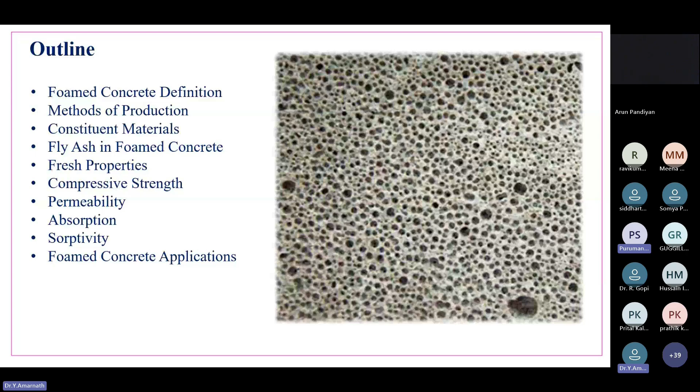Now coming to foamed concrete. If you define foamed concrete, it is a cementitious material where air is entrained by the mechanical incorporation of preformed foam or admixture into a mortar. So that is called foamed concrete. It is a lightweight material. In cementitious material, we incorporate foam into that cementitious mortar by some other external activity.

There are three methods by which we can introduce foam into a cement mortar: first is pre-formed foaming, second is mixed foaming, and third is combined foaming. Coming to the first method, incorporation of foam into the foam concrete to produce the foam: before producing foam concrete, first we need to produce mortar. Cement and water need to be mixed to form cement mortar, which needs to be durable, flowable, and have some consistency. At that stage, we incorporate foam into that mortar to produce foamed concrete. We need to introduce air through foam into that mortar. So those are the three methods.

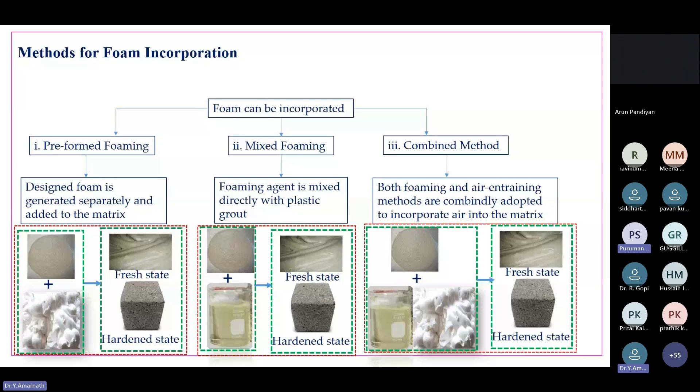Foam concrete has its own unique properties. That's the reason why foam concrete has its own applications, which we will discuss later in this presentation. So first we will discuss the unique properties of foam concrete.

The first property is that it is self-flowing, like a liquid. We can pour it like water. It flows like water, as you can see here. The workability of this foam concrete is very high; we can just pour it like water.

You can see here, it is self-compacting, and it should never be compacted. Why? Because it already contains air bubbles in it. If you allow external energy to compact it, those air bubbles will be destroyed and there won't be any foam concrete left. That's why external compaction is not needed for foam concrete. It is self-compacting.

The third unique property of this concrete is that we can produce a range of densities. This is a major advantage of foam concrete. You can produce densities starting as low as 200 kg per meter cube and as high as 1800 kg per meter cube, depending on the application and where we are going to use this foam concrete.

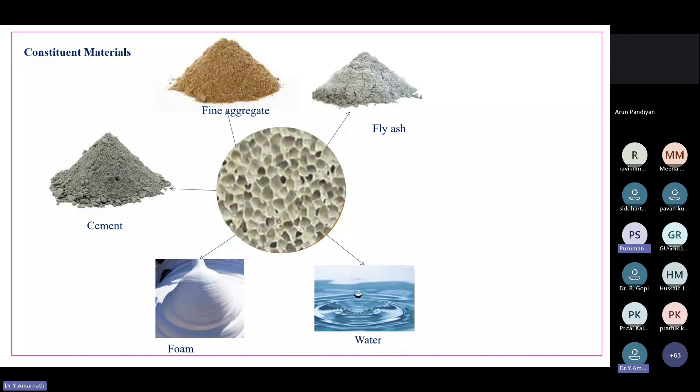As we are discussing, this training program title is Sustainable Construction Material. So, fly ash is one of the waste materials that we use to produce some concrete.

Foam concrete is also not exceptional. We can use fly ash in majority of the cases to produce the foam concrete. So fly ash can be incorporated in foam concrete, and majority of the foam concrete mixes use fly ash. Sometimes in place of sand, only fly ash can be used, depending upon density requirement and applications. Fly ash is replaced either by cement or by fine aggregate, as in normal concrete.

Fly ash can be replaced either by cement or by fine aggregate, for the same density. The replacement levels are as high as 80% by mass of cement in foam concrete production. Whereas it is up to 100% sometimes, as we need not use any sand content to produce foam concrete. That's the reason why 100% fly ash can be used - only cement, fly ash, and foam to produce foam concrete.

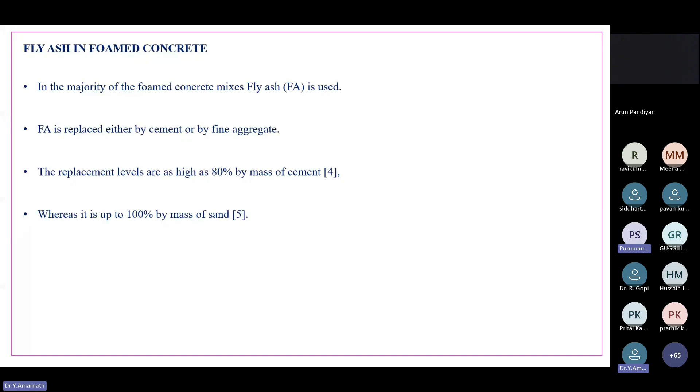If you use fly ash in foam concrete, the consistency increases as in normal concrete, because fly ash has a ball bearing effect. The microstructure of fly ash is at micron level - if you observe fly ash, the particles are ball shaped, so that helps increase consistency. The same property that helps in normal concrete helps in foam concrete.

So if you use fly ash in foam concrete, the consistency increases, like you can reduce the water content. And long term strength - as we all know the pozzolanic activity of fly ash improves long term strength of normal concrete - the same is applicable for foam concrete as well. On the whole, fly ash in foam concrete increases its performance.

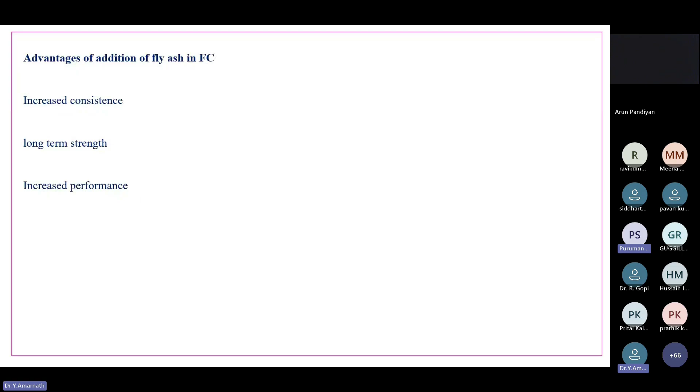Up to now, we have discussed what is foam concrete, what are the special or unique properties of foam concrete, and how we can produce foam concrete using fly ash. Now I will see what are the properties of foam concrete.

Fresh properties of foam concrete: foam concrete has self-flowing ability up to 1800 kg per meter cube, as we discussed earlier. This is a unique property - we can just pour the concrete like water, up to 1800 kg per meter cube. However, depending upon density, this flowability changes. At very low densities, flowability may not be that good; equally, at very high densities, the flowability may be affected.

Depending on the density, the flowability of the concrete is affected, but on the whole, foam concrete is a flowable material. As discussed earlier, for the same density and same water content, if you replace cement with fly ash, the workability of the foam concrete increases because of the ball bearing effect. As you can see in the microstructure of fly ash, the round ball bearing effect helps the foam concrete increase its flowability.

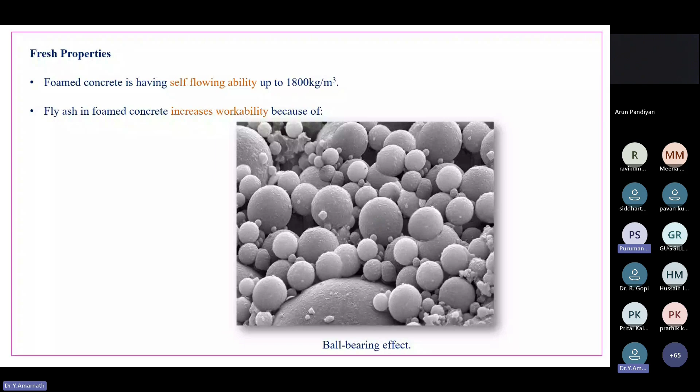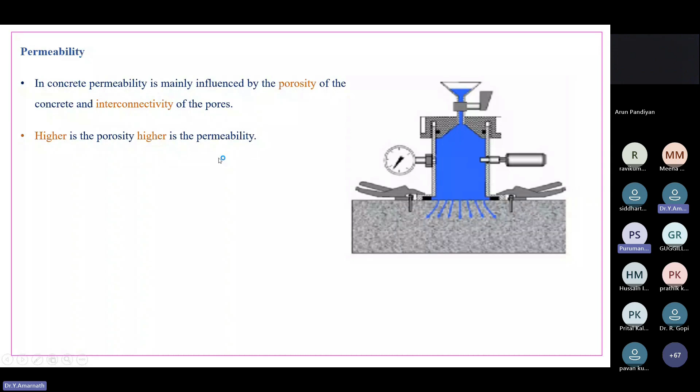In foam concrete, for the same density, if fly ash increases in place of cement content, interconnectivity of pores increases and thereby permeability increases. At the same density, if sand is replaced with fly ash, interconnectivity of the pores reduces and thereby permeability reduces. The comparison here is between replacement of fly ash and sand. If we replace sand with fly ash, the pore system reduces because, for the same pozzolanic activity, the solid material in that particular concrete increases, so the pore system reduces and permeability decreases.

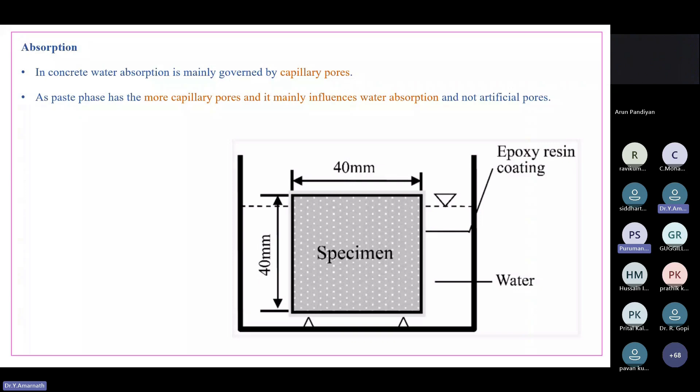Now, coming to the absorption property of foam concrete, contrary to normal concrete, in foam concrete the absorption increases with increase in strength. Usually in normal concrete, as strength increases, absorption decreases. But in foam concrete, at lower levels there is an artificial pore system present, and capillary interconnectivity disconnects that artificial pore system, so the absorption increases at lower levels. Please observe this statement: contrary to normal concrete, in foam concrete the absorption increases with increase in strength. As strength increases, absorption increases in foam concrete, but that is not the case in normal concrete, where as strength increases, absorption decreases.

The absorption increases with increasing density, because to increase the density, the paste content needs to be increased, thereby absorption increases as the paste phase in foam concrete increases with density. For the same density, when compared to sand mixes, water absorption is more for fly ash mixes. This is because sand is a high dense material and fly ash is a low dense material, so if you replace sand with fly ash in foam concrete, the paste phase increases and thereby the capillary pore system increases and absorption increases.

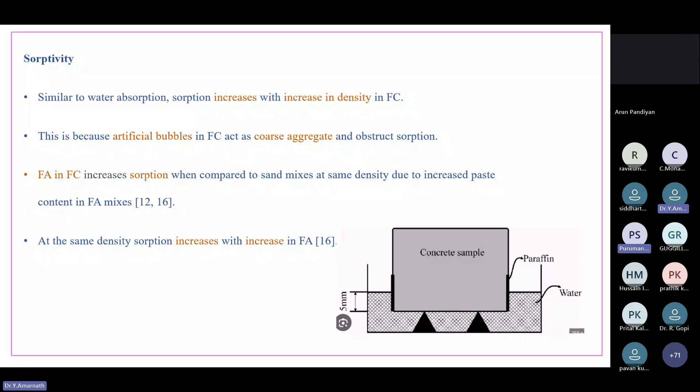These are a few unique properties of foam concrete that we have discussed so far. Now coming to applications of foam concrete. Foam concrete has a lot of applications. We can find many applications in normal construction. Foam concrete can be used in many places.

The first one is void filling. This concrete is very useful at lower densities because at lower densities, cost to volume ratio is very low. So we can use low density materials to fill redundant places like old sewage pipes. Say there is an old sewage pipe which is no more useful - this is one such sewage pipe, filled with foam concrete. Sometimes it may be cheaper than soil, since transporting soil may be costlier, but a cost comparison needs to be done. So we can use foam concrete to fill old and redundant pipe systems, sewage pipes, or any other pipe system not in use.

And open wells - in many places we find wells that are dangerous for normal living. Instead of filling such wells with normal sand or soil, we can use low density foam concrete to fill them. Likewise, cellars and basements of old buildings, all places where the structure is no longer in use, we can use foam concrete instead of sand or soil to fill that redundant structure.

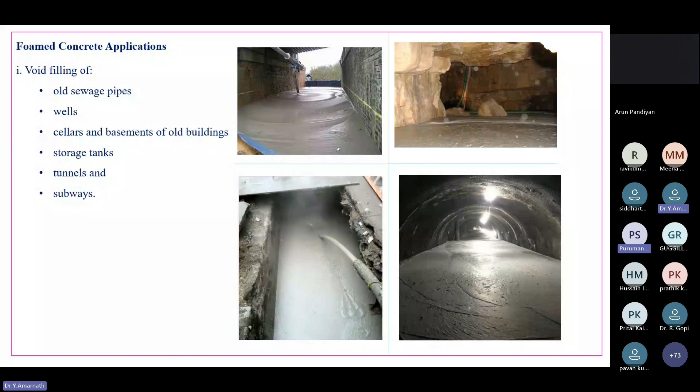Other applications include soil slope stabilization - we can use foam concrete for slope stabilization, one of the economical applications for stabilization of soils. It's also a replacement for weak soil to avoid settlement - in many cases you can take out the weak soil and replace it with foam concrete.

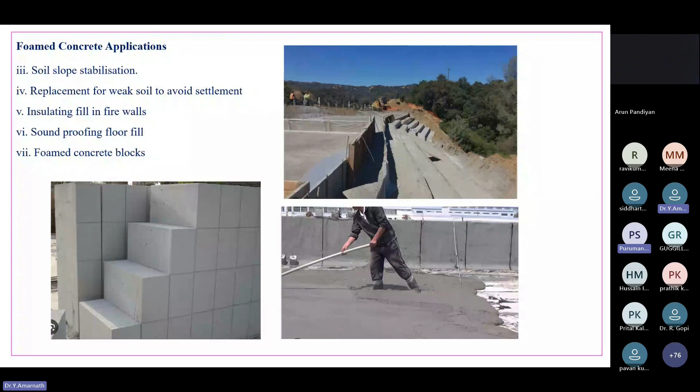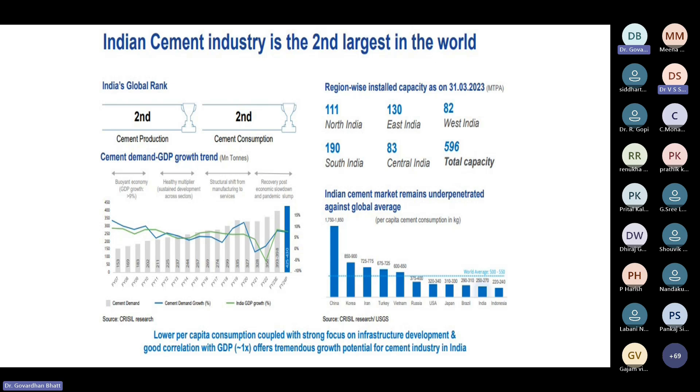Understanding the environmental impact of cement production. Let us understand the impact of cement production on our environment. Cement production is responsible for approximately 8% of global carbon dioxide emissions, making it one of the most significant contributors to greenhouse gas emissions.

The production process involves several stages, each with its environmental challenges, like raw material extraction. This is one of the major issues of environmental impact. When we extract raw materials such as limestone and clay for producing cement, it leads to habitat destruction and biodiversity loss, which impacts nearby areas wherever the plant is installed; the environment gets damaged.

Clinker production: the calcination of limestone in kilns generates the majority of carbon dioxide emissions in cement production. The temperature of the kiln is 1400 to 1500 degrees centigrade. During the cement production process, this is the operating temperature.

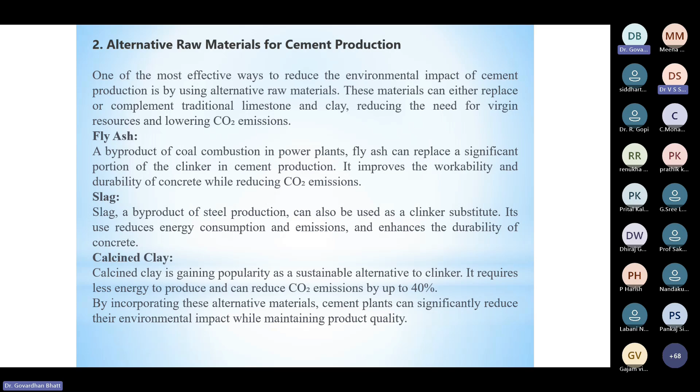Third point is energy efficiency and waste heat recovery. Improving energy efficiency is crucial for reducing the carbon footprint of cement production. Energy efficiency measures not only lower emissions but also reduce operational costs.

Upgrading kiln technology: modern kilns are designed to be more energy efficient than traditional ones. Preheater and pre-calciner technologies allow for the recycling of heat, reducing the need for additional fuels.

As I said earlier, the temperature of the kiln is 1400 to 1500 degrees centigrade. When it goes through the cooler, the temperature drops down to 150 degrees centigrade. This heat can be recycled in the preheater, and we use this heat in the preheater for mixing the cement powders.

Waste heat recovery system: this captures excess heat from the cement production process and converts it into electricity. This reduces the cement plant's reliance on external power sources and lowers overall energy consumption.

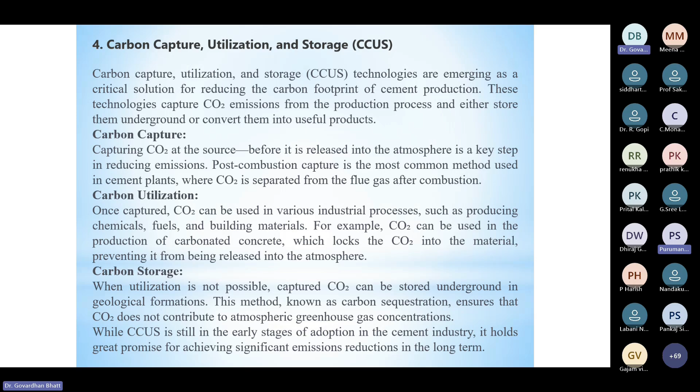Reducing water usage and enhancing water management. Water is a critical resource in cement production, used in various stages of the process, including cooling, dust separation, and material preparation. However, the industry faces increasing pressure to reduce water consumption and improve water management due to growing scarcity of freshwater resources.

In our plant, we store water in our mines whenever we excavate limestone. There are many storage areas in our plant where we store our water, some of which comes from rainwater as well. The main issue is water storage, so what can we do to store this water?

Closed loop water system: implementing a closed loop water system in a cement plant can significantly reduce water consumption. This system recycles water within the plant, minimizing the need for external water sources and reducing wastewater discharge.

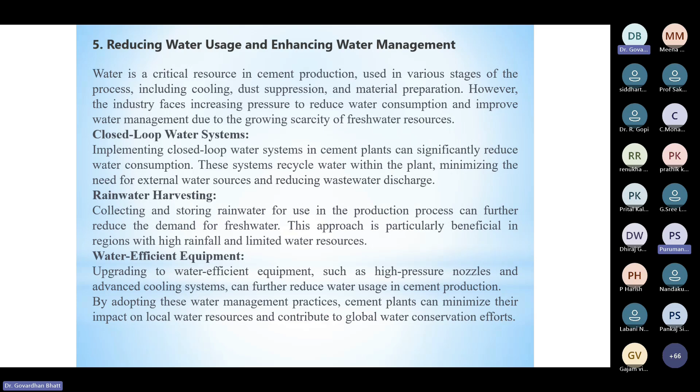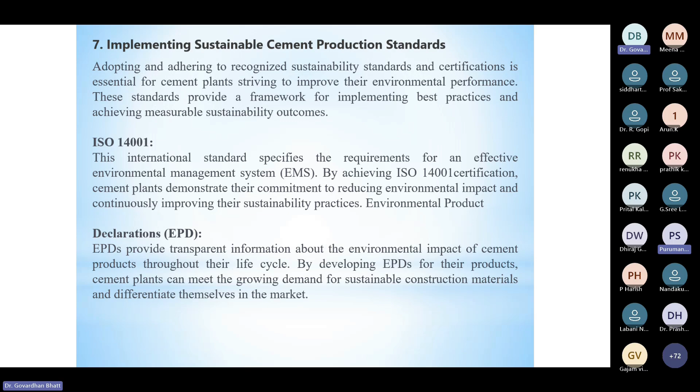Green building certifications: cement plants can also contribute to green building certifications such as LEED (Leadership in Energy and Environmental Design) and BREEAM (Building Research Establishment Environmental Assessment Method). By supplying sustainable cement products, plants can support the construction of environmentally friendly buildings and infrastructure. Adhering to these standards not only enhances the sustainability of cement production but also improves the plant's reputation and marketability.

A few more slides. Community engagement and corporate social responsibility, CSR. Sustainable cement production extends beyond the plant's operations. It also involves engaging with local communities and contributing to their well-being. Corporate social responsibility initiatives play a vital role in building positive relationships with stakeholders and enhancing the plant's overall sustainability.

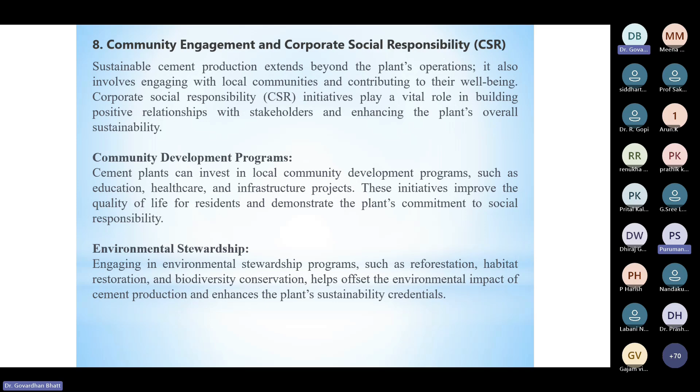Transparency and reporting: regularly reporting on sustainability performance through sustainability reports and stakeholder engagement helps build trust and accountability. Transparency in environmental and social practices ensures that the plant is held to high standards by both the community and regulators.

By prioritizing CSR and community engagement, cement plants can create a positive social and environmental legacy, reinforcing their commitment to sustainability.

The future of sustainable cement production. The cement industry is at a crossroads, with sustainability becoming an increasingly critical factor in its future. As environmental regulations tighten and customer demands for sustainable products grow, cement plants must continue to innovate and adopt sustainable practices like research and development, R&D.

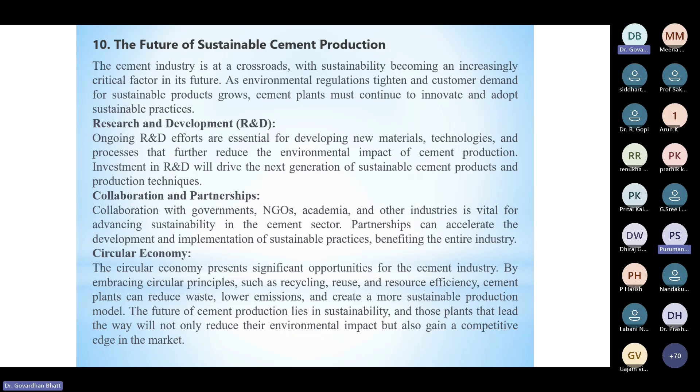Conclusions: sustainable cement production is no longer an option, it's a necessity. The techniques and practices outlined in the guide provide a roadmap for cement plants to reduce their environmental impact, improve resource efficiency, and lead the industry towards a greener future.

By embracing alternative raw materials, energy efficiency, carbon capture, water management, digitalization, and community engagement, cement plants can achieve significant sustainability gains and secure their place at the forefront of the global green economy. As the world continues to prioritize sustainability, the cement industry must rise to the challenge, adopting innovative practices and technologies that reduce its carbon footprint and contribute to a more sustainable future for all.

By implementing these sustainable cement production techniques, your plant can not only meet the demand of today's environmentally conscious market, but also position itself as a leader in the industry's transition to a more sustainable future. This approach will ensure that your cement production processes are not only efficient and cost effective, but also aligned with the global goals of reducing carbon emissions and conserving natural resources.

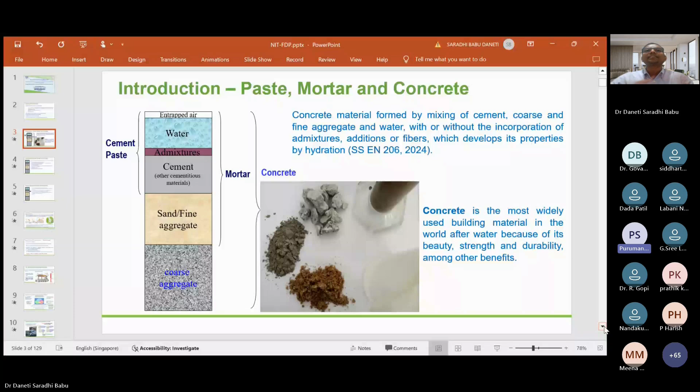If you look at materials research, especially on cement and concrete, there are so many areas, because every component gives you scope to come up with a research proposal. Sometimes you may need to understand more about the microstructure of concrete, which requires special testing methods different from what currently exists. Likewise, you may need to understand the cement chemistry behind it, and there are different cementitious materials we need to consider, because later I will show you why we need to use cementitious materials instead of ordinary Portland cement.

On top of that, those are part of sustainable materials - use of recycled materials like byproducts, alternative materials, all those are sustainable materials, and I'll show some examples later. Admixtures for different applications may require different performance criteria - workability, strength development and setting time controls. Fibers in concrete are also getting popular because they help minimize cracking tendency, and controlling cracks enhances durability. You can also work on other special materials like lightweight materials and aggregates. So concrete is a very huge area with a lot of potential for research.

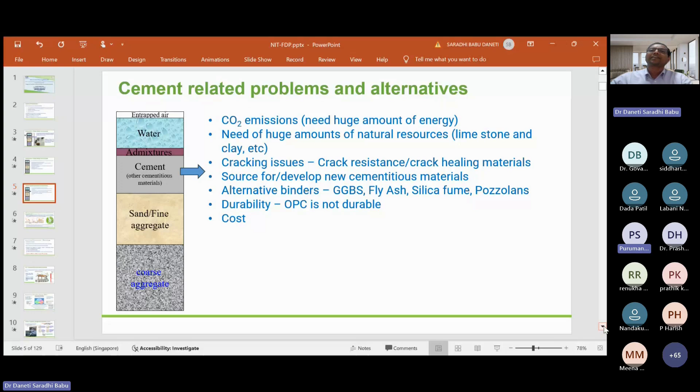We also have to give priority to the durability of the concrete, because when we design a concrete structure for 50 years or 100 years of service life, we have to use the required performance criteria, also consider it when we come up with a mix design for a specific construction. And always you have to think about the cost, how to optimize the project cost while fulfilling all the required performance criteria.

So why do we have to go for low embodied carbon products? Because buildings are currently responsible for 39% of global energy related emissions. 28% is from operational emissions. Operational emissions are basically the emissions after the construction of a project, in terms of energy related needs for heating, cooling, to power them, we have to use a lot of energy.

The remaining 11% comes from materials and construction. This part we call embodied carbon, all the 11% from materials up to construction. Beyond that, after construction, during service life, emissions are involved as operational emissions. Even though embodied carbon looks like a small amount compared to operational emissions, the huge stock of constructions involved to cater for the increased population is the reason why we have to give priority to it.

Some estimates say that towards the middle of the century, as the world population approaches 10 billion, the global building stock is also expected to double in size, which means we may expect a substantial amount of embodied carbon emissions apart from operational emissions, which as a civil engineer or material researcher you may not be able to control. But you can give priority to control the embodied carbon related emissions.

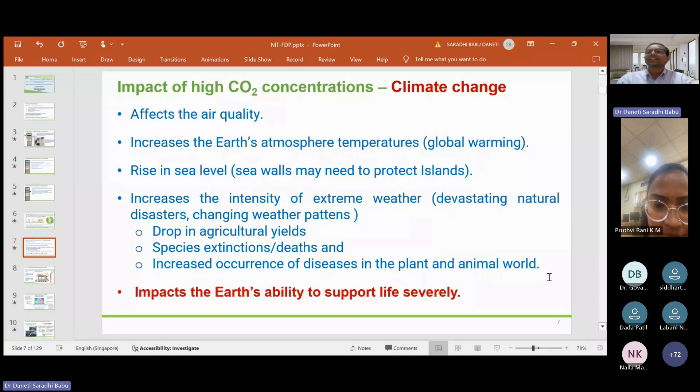So where do these emissions come from when it comes to the cement and concrete industries? Cement is one of the fine powders, basically a soft powder used as a binder because of its hardened properties when it is mixed with water. It is produced from a mixture of limestone and clay that is charred and then ground up. Here limestone and clay are natural materials, and you need to mix them properly.

After you grind them to a fine powder, you have to feed them through the rotary kiln. When you feed through the rotary kiln, which involves 1450 degrees Celsius temperature, the material will be converted into a clinker in the form of CaO plus CO2 liberated. In that process, basically there is a huge amount of CO2 liberation that takes place.

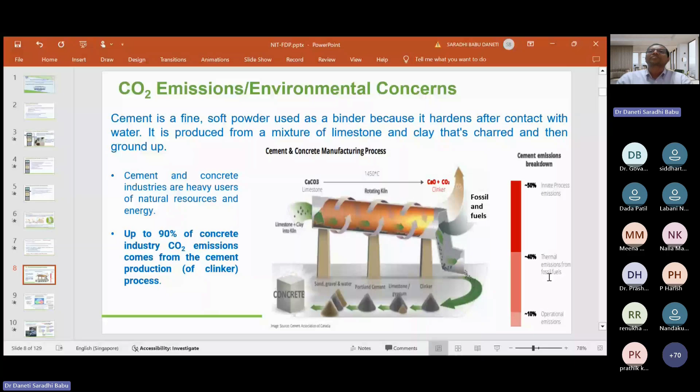On top of the transportation of cement to construction sites, we use a lot of natural resources like aggregates to produce concrete. Even though subsequent emissions are not so huge, cement production creates a lot of CO2 emissions. In the cement and concrete industry, basically 90% of emissions come from the cement manufacturing process itself. That is the reason why supplementary cementitious materials play an important role.

Later on I will show you some numbers and examples. You will understand how significantly we can reduce the CO2 emissions with the use of supplementary cementitious materials.

These supplementary cementitious materials are byproducts from other industries. Sometimes we use the available natural soil or similar materials to convert into natural pozzolans. Once it is a byproduct, it becomes waste. If there is no application for it, it takes up land for landfilling, which pollutes the soil as well as the groundwater. So as long as you have a usable application for the supplementary cementitious material, that increases the value of the waste product at the same time.

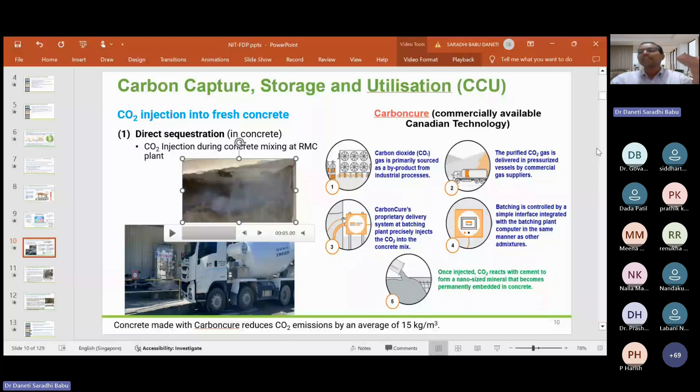As I mentioned, there are a lot of researches ongoing worldwide. Some are trying to pump CO2 into recycled aggregates to understand the potential absorption levels.

Some are trying to pump CO2 into recycled water, since recycled water, once it has certain parameters, can react with CO2 and produce some useful minerals. It can be used as a strength enhancer in some scenarios.

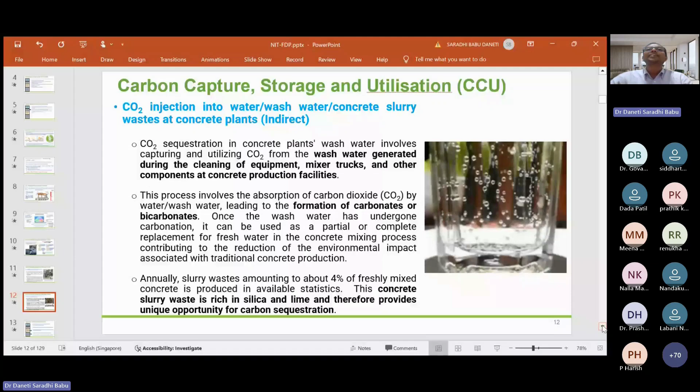As I mentioned, there are researches ongoing trying to pump CO2 into water as well as recycled water, and those recycled ready mix concrete slurries. When you have ready mix operations, there is always a lot of washing water. These wash waters can be treated and used to a certain extent with these kinds of technologies.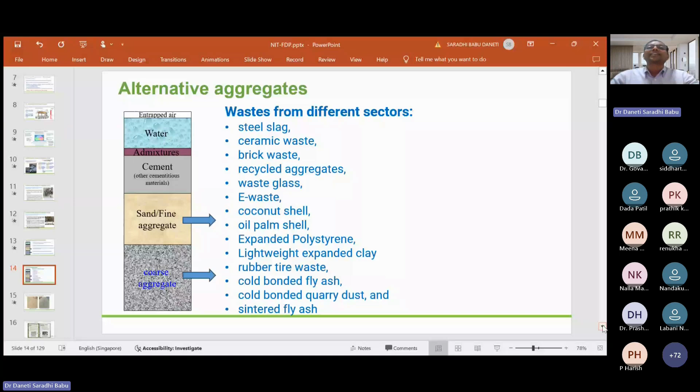And the particular provinces. So if you look at natural resources, if we keep relying on river sand and things like that, there is always erosion happening because of the dredging of sand, taking the natural sand from rivers.

So we have other substitutes like crushed granite fines, or whatever the aggregate crushers use - it can be limestone fines or whatever aggregate is nearby available. Those materials can be used as recycled fine aggregates, as replacement aggregates to natural sand, so that lessens the impact of always relying on natural sand. There are some examples later on I will show you.

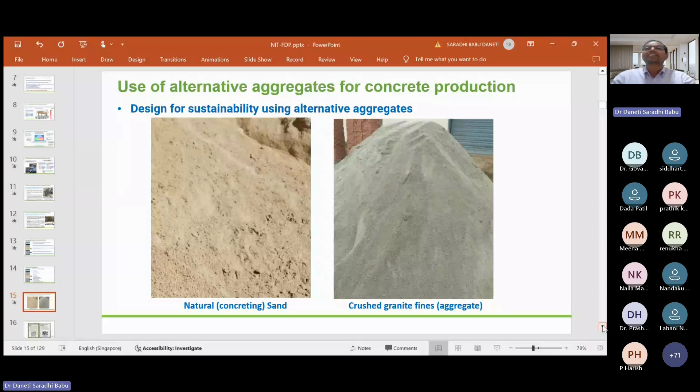When it comes to the Singapore scenario, we are accepting even up to 100% of granite fines for construction. How can granite fines be used? It can be used like natural sand, but depending on the rheology of the matrix, you need to do some modifications in order to achieve the required workability. You may have to consider additional admixtures or additional cement content to achieve the required performance and properties.

That is the reason why we have to see what other alternative materials are available. You have to assess the quality, you have to assess the performance with respect to natural aggregates. Then you can come up with recommendations and guidelines for the industry, whereby they can adopt the solutions.

So who can give the guidance? Only institutions like you - NIT, IIT, and research centers - have to provide useful information to the industry, by coming up with research followed by pilot projects, sometimes assessing the long-term performance. All this you have to document, present in conferences, and publish here and there. Those will create awareness.

Then people start thinking of using it, especially industrial collaborators. They may come and approach you - can you give us the solution? So they may give you research funding to expand the research.

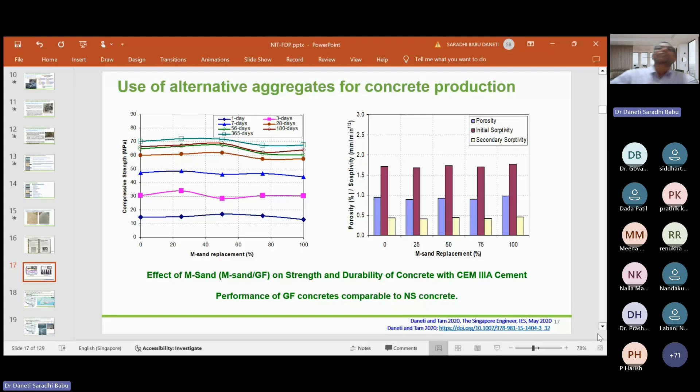So if you look at other details, just now I mentioned granite fines - the use of granite fines currently in Singapore. We are moving one of the current existing mega ports, the terminal, from the center of Singapore to one side of Singapore.

For this port construction, we need to produce caisson sea walls. These are huge structures, and later I will show you the dimensions. These sea walls are produced and placed into the sea, and the compartments are filled with other materials to construct a port at the required location.

Basically, in both projects, we involved 1.5 million cubic meters of concrete volume, and in one project we used 100% granite fines.

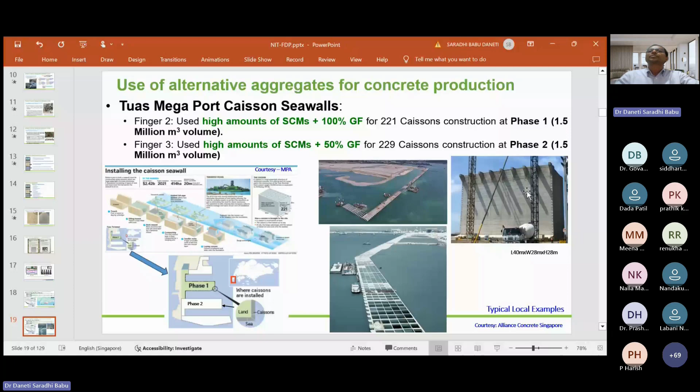It is a non-stop slip form based construction done by the South Korean team, Daelim Construction, as well as Hyundai. The slip form construction requires a special kind of concrete because it is non-stop casting. Concrete is placed into the forms, and the slip forms jack up every 20 minutes. This means the previously placed concrete below has already set. They lift up the forms slowly, by 20 centimeters at a time - it is a non-stop kind of casting.

So when dealing with those kinds of projects, you need a very consistent quality of materials, and at the same time you need very robust admixtures and similar solutions. These are some of the areas to consider when coming up with solutions for the end user.

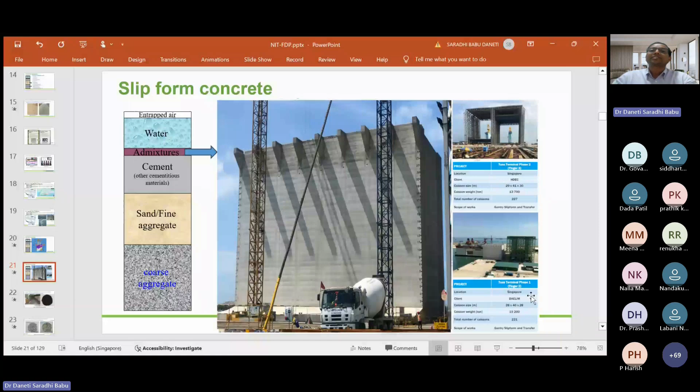So this is the caisson wall I mentioned - something like a 28-meter high wall constructed with the slip form method. The first phase of the terminal was constructed by the Daelim team, whereas another phase was done by Hyundai. Both are South Korean contractors.

On top of that, in the Singapore scenario we have a shipbuilding industry. To do maintenance of the ships, the ship surfaces and hulls need periodical maintenance. For this maintenance, they use copper slag - they spray it onto the ships and hulls, and all of this deposits into the sea, so this waste accumulates in the sea.

So we excavate this waste, treat it, and use it as a fine aggregate as well in Singapore. In Singapore construction, they allow replacement with this material up to 10% of fine aggregate.

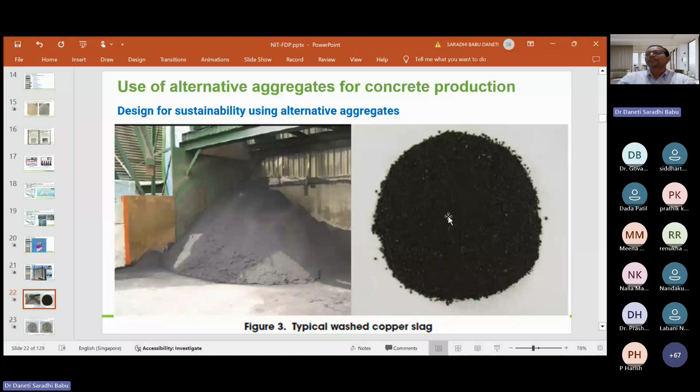On top of that, there's recycled coarse aggregate. Whenever there's demolition of buildings, a lot of coarse aggregate is produced. We follow a demolition protocol similar to UK practices - you isolate concrete chunks to one side and other debris to another side. All the hardened concrete and big chunks go to recycling plants.

They try to separate the aggregates from the rest of the mortar and similar materials. The concrete aggregate quality again has to be assessed and must comply with the standard. In Singapore, SS EN 12620 is the aggregate standard.

You have to produce the recycled aggregate quality to comply with that standard. In Singapore, we allow up to 20 to 30% of recycled concrete aggregates to replace the natural crushed granite or whatever aggregate. In Singapore, everything we import from neighboring countries. For structural concrete applications, we use only one kind of aggregate - granite aggregate. We don't use any other aggregate.

But currently, if the granite aggregate is not available, what is the next option? We are doing some research on limestone aggregate also. When it comes to the usability of limestone, it is not new - it is already being used everywhere it is abundantly available. But for the local scenario, we want to do some R&D, so currently there is some research funding by the government to the universities. They are doing research on this. So let's look at how to minimize the waste.

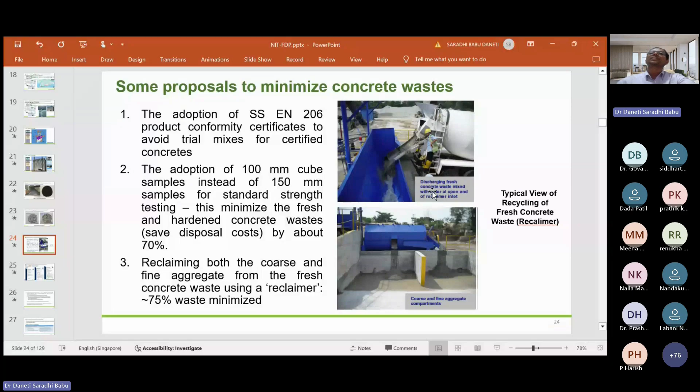So on top of that, which I already discussed, number 3 is the reclaiming of aggregates from waste concrete. These are all certified products - how it looks like, as I mentioned, it is M30 to M60. We follow a global unified definition, strength class C25 by 30, means 25 is the cylinder strength and 30 is the cube strength. In India we follow M30 - M30 is nothing but it should be a cube strength.

So this is the unified definition, but in Singapore we still practice cube strength only for the strength assessment of concrete, similar to the UK practices. We don't use cylinders like the US, which follows cylinders as the criteria. So when it comes to the definition of strength class, they will still use C32 by 40 or 25 by 30 for example, and when they do the strength assessment of the cylinder, they will verify against 25 instead of 30. We practice cube, so we have to verify and comply with the 30 if we refer to M30 concrete or C25 by 30 concrete.

So what are the other materials? Just now I mentioned secondary raw materials can be used in construction - it can be an aggregate alternative material or a cementitious alternative material. So these are byproducts from other industries - if they don't have any value, it becomes a negative value because you need to pay somebody to come and collect the material. But when you find an application for the material, they will come and pay you to collect it. That is called creating value from the waste. So the cost associated with disposal and landfilling can be eliminated, and at the same time, supplementary cementitious materials - which I'll show you some examples of later on.

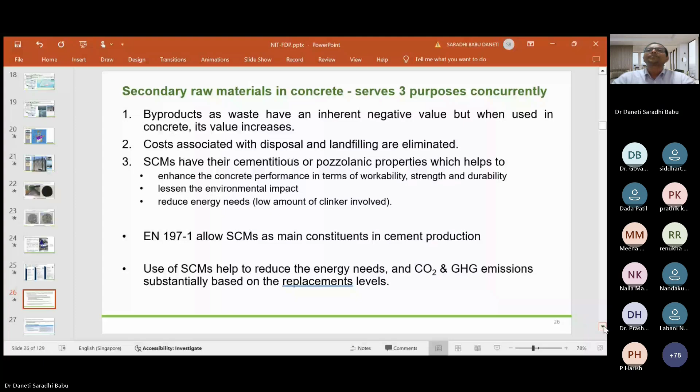What are the Singapore practices locally? As I mentioned, we have a concrete standard, SS EN 206, and an aggregate standard, SS EN 12620. These two standards encourage the use of other kinds of materials for concrete production. Since 2005 we have had green concrete usage and green concrete practices locally, and we already have had a few versions of revisions and improvements all the way from 2005 to 2021. Now we are following currently the green mark.

BCA is nothing but Building and Construction Authority Singapore. They always come up with guidelines to the industry. Based on the current guidelines, for all new constructions now you have to do your whole life carbon assessment. Why do we need to do all this? Because we support the Paris Agreement 2030 and 2050 net zero emissions targets, and we guide industry people with the specifications and guidelines from the government to reduce CO2 emissions as much as possible.

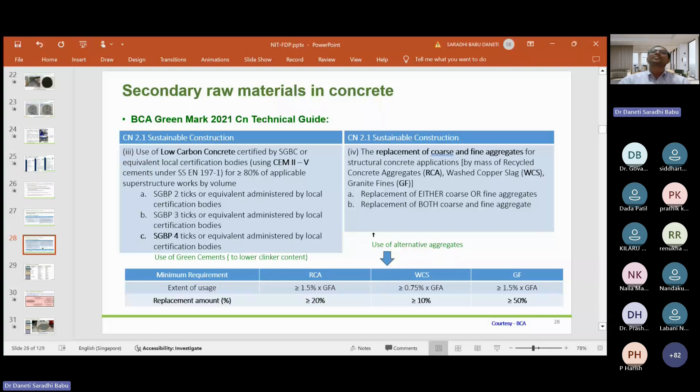Likewise, as I mentioned, we have certain minimum requirements when it comes to recycled concrete aggregates - you have to use at least a minimum of 20%. When it comes to water washed copper slag, that is actually maximum replacement - there is a typo error here. When it comes to granite fines, you have to use at least 50% to 100% range. If you use less than 50%, you may not be able to get a certain number of green mark points.

If you look at the admixtures, every component of the concrete is actually one of the research areas. Based on the type of project, sometimes you may have different kinds of requirements - sometimes you need accelerators to achieve early strength, sometimes you may need consistent setting times, as I mentioned earlier with slip form construction. So admixtures is a very big research area as well.

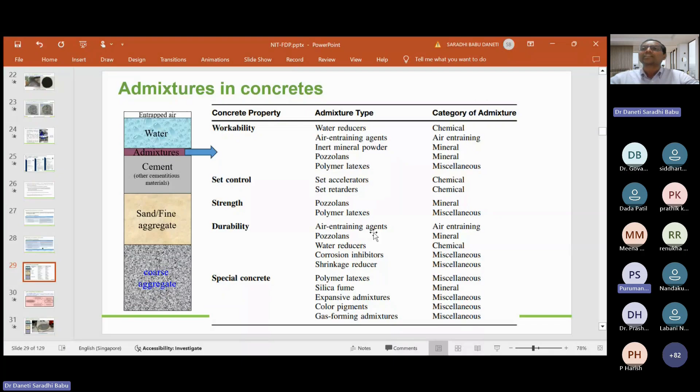Now you all know self compacting concrete. There is background noise, maybe someone can please mute. When it comes to self compacting concrete, basically you have to use specialized new generation admixtures.

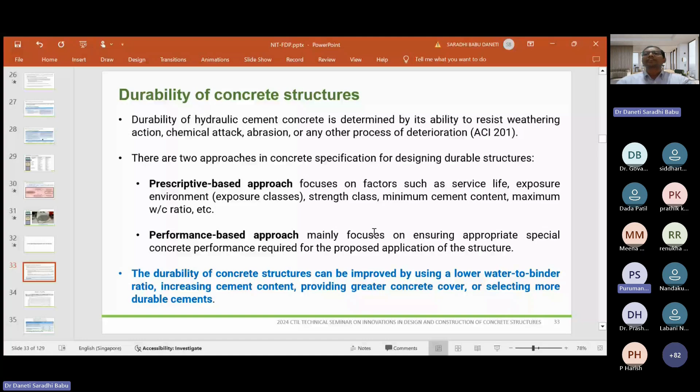So you need to maintain certain quality in terms of the water cement ratio, strength, and minimum cement content.

When you use highly durable cements, the required levels can be reduced. Later on I will show you some details.

If you look at concrete quality, you need to control the chloride content within the concrete. How do you estimate it? You have to know the chloride content of all the constituents involved in a given mix design for 1 cubic meter. These chloride contents need to be controlled when it comes to reinforced concrete structures.

For structural concrete, you need to limit your chloride content to 0.2% by weight of the cementitious content. But when dealing with pre-stressing and post-tensioning scenarios, the chloride content is limited to only 0.1%. So in terms of expressing the chloride class, we go with Cl 0.2 for reinforced concrete, whereas Cl 0.1 for pre-stressed concrete construction.

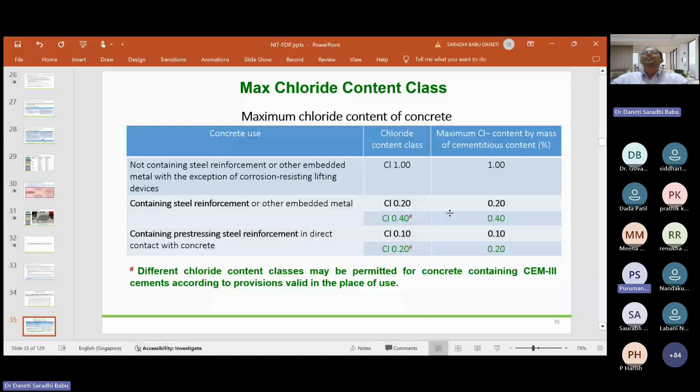Nowadays, cement producers are not producing sulfate resisting Portland cements because those may delay the sulfate attack to a certain extent, but those are not as good as and as effective as CEM III type of cements. CEM III type of cements are in fact more durable and sulfate resisting than sulfate resisting Portland cement.

If you look at the concrete structural design, there is always an allowable crack width defined. The allowable crack width for reinforced concrete members and pre-stressed concrete members without bonded tendons is 0.3 mm, both for reinforced as well as pre-stressed members without bonded tendons. Whereas for pre-stressed members with bonded tendons, the allowable crack width for durability is 0.2 mm.

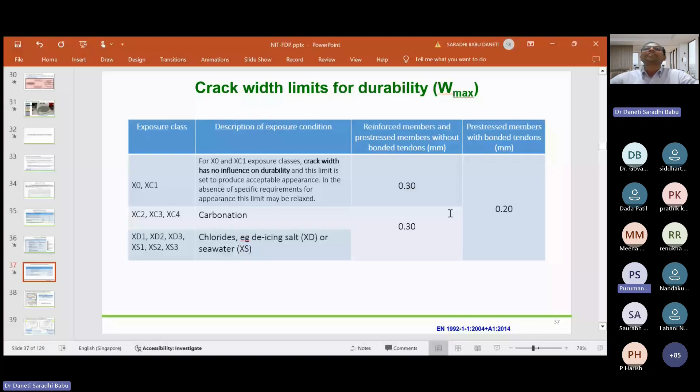Here basically these exposure classes are defined for 50 years of service life and 100 years of service life, as shown on the right side description. This exposure class is related to corrosion induced by carbonation related scenarios. For corrosion related carbonation scenarios, they have defined the strength classes from C20/25 to C50/60 in the standard.

But they have not defined what is the maximum water cement ratio required or minimum cement contents required, because now, as I mentioned, moving to performance based specifications, they are not very much worried about the maximum water cement ratio limits and minimum cement content limits. As long as you achieve the concrete performance, it can fulfill the required durability.

And again, if you look at the nominal concrete cover, for 50 years of service life you need to have 65 mm, whereas for 100 years of service life it is now increased up to 75 mm.

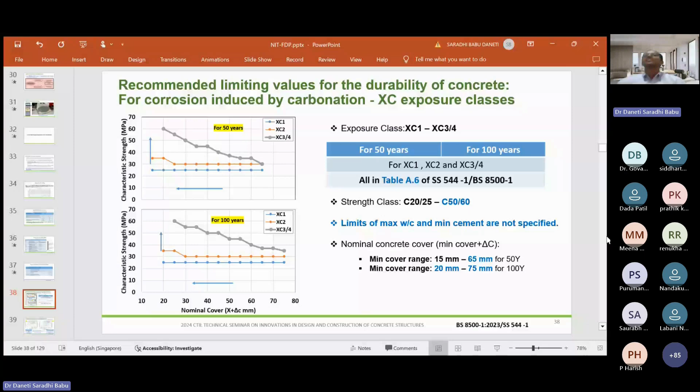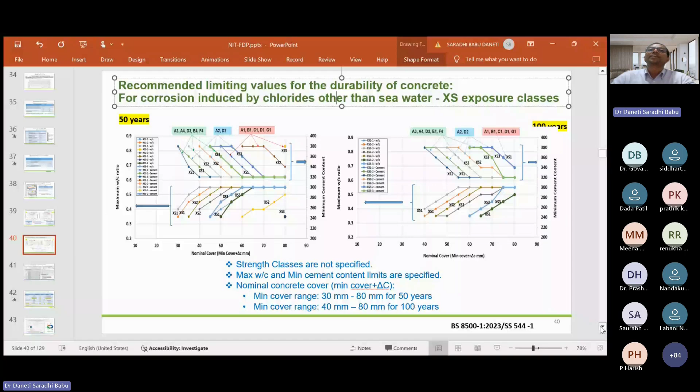Natural pozzolans can be natural type or calcined type - fly ash, burnt shale, limestone powder. All those are allowed in the cements now. Combinations up to 35 percentage, or if you're looking at composite cements, you can go with different combinations, but you need to comply with certain cement quality requirements. It may be in terms of 2-day strength or 28-day strength, to categorize the cement quality into 42.5 or 52.5 kind of cement categories and classifications.

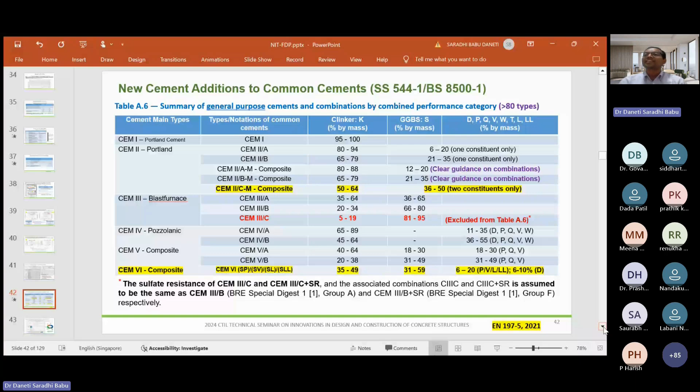Nowadays you might come across cements like LC3. So what does LC3 mean? Limestone Calcined Clay Cement - you can see three C's and one L, that's called LC3. So what composition does the LC3 cement consist of? Typically 30% calcined clay, 50% OPC, 15% limestone, whereas 5% other minor constituents like gypsum and things like that. So this is the typical combination.

So nowadays they are allowing limestone powders to produce cement. Many places, especially in Europe, are extensively using this because in Europe, the availability of GGBS is very little, since most steel production and GGBS production takes place in China, India and other parts of Asia, whereas in Europe and US, the slag production and things like that are not that huge. They have some local supplies and production, but the amounts are not sufficient, so they are relying on other kinds of cementitious materials.

So when it comes to durability, you have to use highly durable cements. This is for marine applications - there's another standard called BS 6349-1. They have given some recommendations with different exposure classes, defined as XSM2, XSM3, XSM4, similar to XS1, XS2, XS3. So you have to go with highly durable cements when it comes to XS3 or XS4 type of exposure classes.

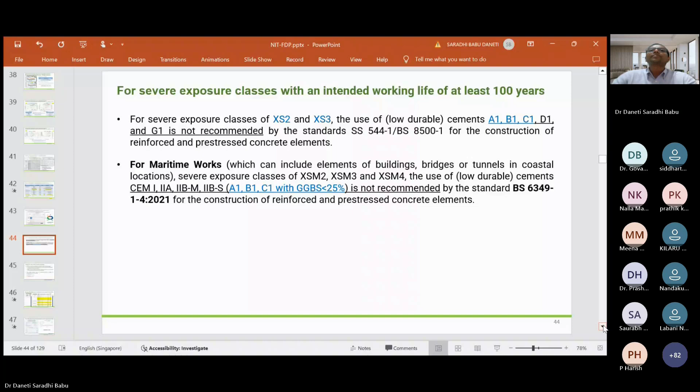So how to achieve durability at the same time as sustainability? It can really be sustainable when you use supplementary cementitious materials - those give you durability. Durable structures last longer, requiring less maintenance, which means you can lessen the cost of repair and reconstruction, and also lessen the environmental and social impacts. The air quality, CO2 emissions, and all the things can be reduced subsequently, because with less maintenance, your operational emissions will also be lowered.

So the upfront embodied impacts can also be effectively spread over a longer period, because you are enhancing the durability and the service life. So whatever the 11% of embedded carbon emissions from construction up to the construction stage can be spread over longer periods, basically reducing the annualized embodied environmental impacts.

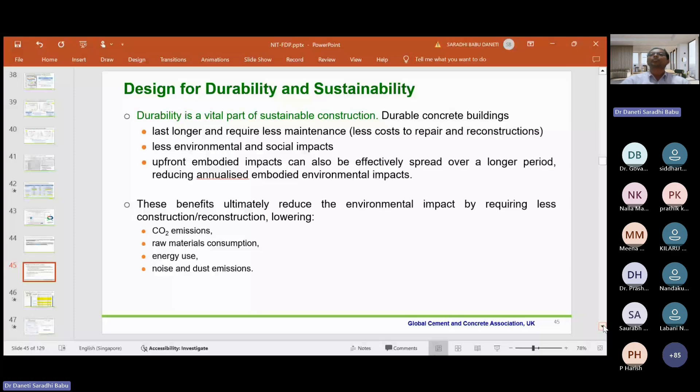Apart from that, these benefits ultimately reduce the environmental impact by requiring less construction or reconstruction and lowering CO2 emissions depending on raw materials consumption, energy usage, noise and dust emissions and pollutions. Okay, so these are just examples.

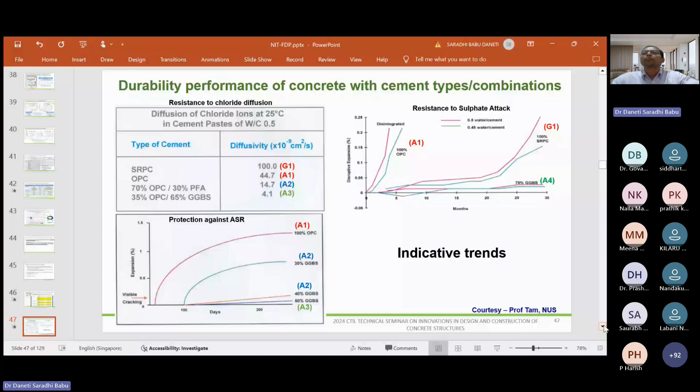The same thing applies to the alkali silica reaction scenario. Protection against alkali silica reaction is much better with GGBS concretes and concretes with fly ash compared to ordinary Portland cements. These are all examples from research that was done and published with high replacements of GGBS in 100% crushed granite fine concrete.

So if you are all interested, you can find more details from the publication.

Nowadays, as I mentioned, crack width is one of the important parameters in determining the durability of concrete. Use of fibers helps to reduce crack widths, and once you control the crack width, you can enhance the durability of the concrete. So macro fibers, both steel macro fibers and polypropylene macro fibers, are getting popular nowadays. These basically enhance the tensile capacity, whereby you can minimize your rebar usage in construction. At the same time, they reduce crack width and enhance load carrying capacities and things like that.

If you look at the definition between macro and micro fibers, basically 0.3 mm is the thickness threshold. If anything is more than 0.3 mm, call it macro, whereas less than 0.3 mm is called micro.

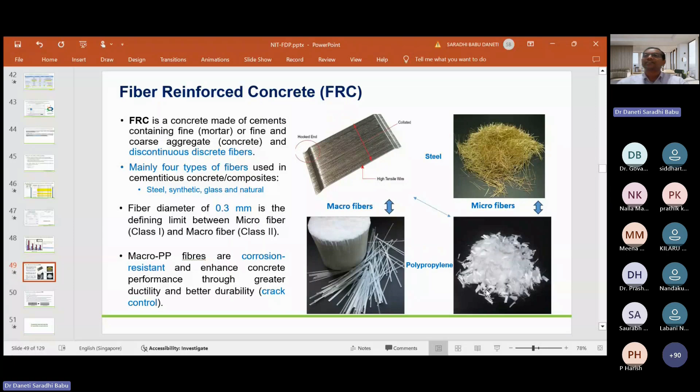If you look at crack control and durability with fiber reinforced concrete based on the ACI PRC 544.10-21 technical note, they have mentioned clearly that fibers help to reduce crack width under severe loads, and also change the crack morphology and pattern.

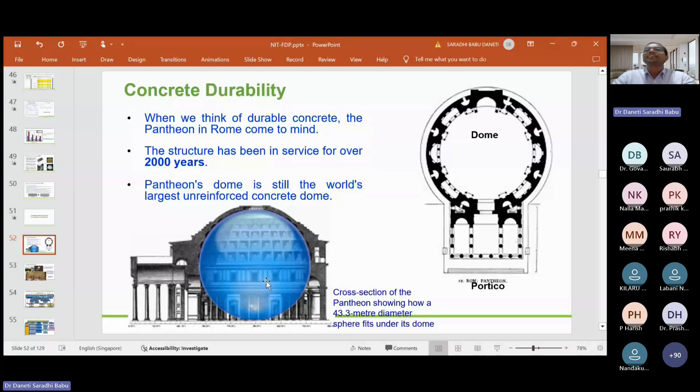Let's look at some details about durability and service life of concrete constructions before we close for the day. When it comes to concrete durability, we always look at the Pantheon in Rome, because this is a very old non-reinforced concrete structure. It was built like 2000 years ago, and it has very good architecture, internal architecture and all, with a natural ventilation hole at the top.

Inside this dome they have drains and all, because rainwater will also enter into it, so you need drains to evacuate the water in case of rain. Any ponding water or improper drainage will affect the durability of the concrete, especially in the service life stage.

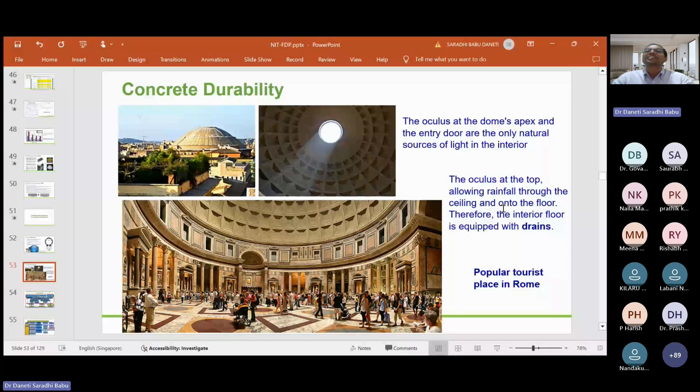If you look at the mechanism between the concepts of durability and performance, you have to have very quality construction, quality construction materials, proper workmanship and proper curing. On top of that, you need proper usage of the right materials, right construction methods, right thickness - these come under the design scenario. You have to have proper detailing, rebar spacing and all the things in order for the concrete to flow and fill the forms completely, so you can have a very good cross section element after construction.

Otherwise, any honeycomb or crack will affect it, so you need proper control. How do you get proper control? You have to have proper construction. These are all typical factors that can affect the durability of concrete structures. You have to have proper materials, and at the same time use right design concepts and workmanship.

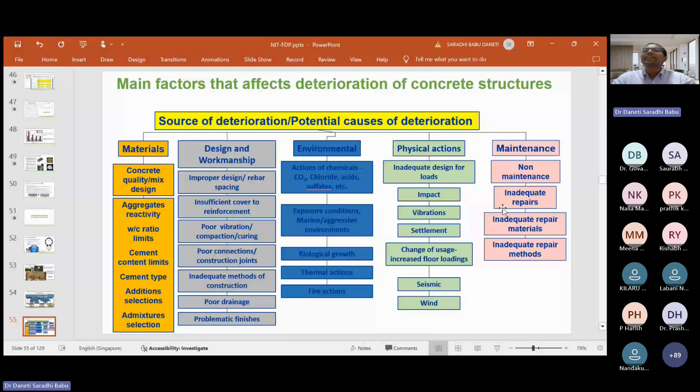Any of these things which you compromise will matter, because you always design the structure based on certain exposure conditions. If inferior quality or inferior construction methods are adopted, the durability of the concrete will be attacked by the influencing parameters at a much earlier stage once you use improper materials and construction techniques. When it comes to concrete deterioration over a period of time, it cannot be eliminated, so we need proper maintenance. If you don't have maintenance, the durability of the structure will be affected.

I won't go into the details, but all these are durability affecting parameters - carbonation, chloride, corrosion of steel in concrete, acid attack, sulfate attack - all those will influence it. That is the reason why we have to design for durability in terms of having good quality control of concrete, as well as good thickness of the concrete cover and all the things.

When it comes to concrete constructions, non-structural cracks tend to happen, but for non-structural cracks you may have to do proper rectifications and things like that. The repair industry is again another industry, especially when it comes to repair and rehabilitation of concrete structures as and when it is required.

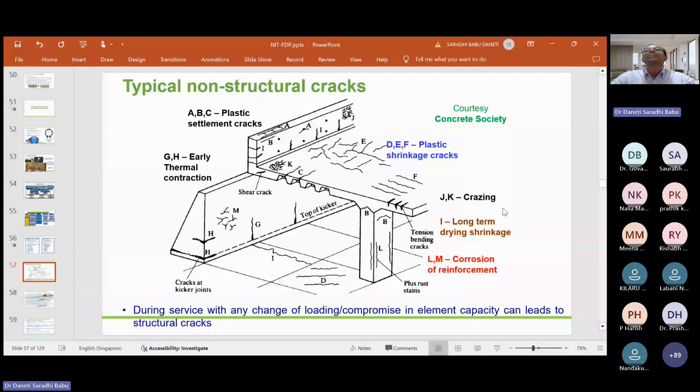You need to have periodical maintenance and inspections with proper repair and rehabilitation, because concrete performance can be affected by errors in design, defective materials, poor construction and similar issues. Also, due to age, structures experience deterioration from corrosion, erosion, sulfate attack, chemical attack, or accidental events like cyclones and typhoons. That's why you have to respond on time with proper inspection and maintenance - if delayed, there's a chance of collapse.

When it comes to design service life - suppose you design concrete for 50 years or 100 years of service life - if you don't do inspection and maintenance, it may collapse after just 10-15 years, depending on construction quality and workmanship. But with periodical inspection, maintenance, repair and rehabilitation, you can extend the service life up to the full design service life. It's not that once constructed it will simply last 50 or 100 years.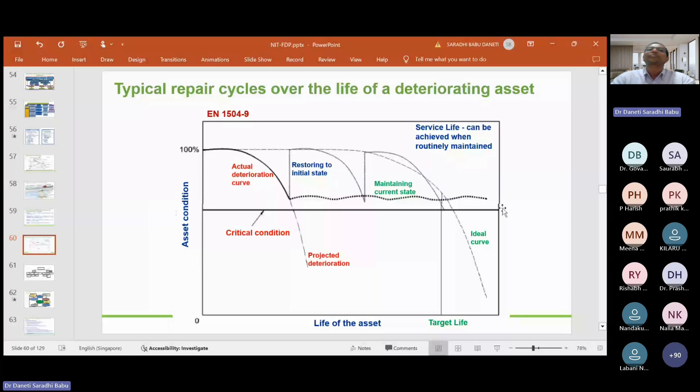You have to do periodic inspection and maintenance. You will achieve the complete design service life only when it is routinely maintained. As I mentioned, defects are basically either concrete related defects or reinforcement related defects.

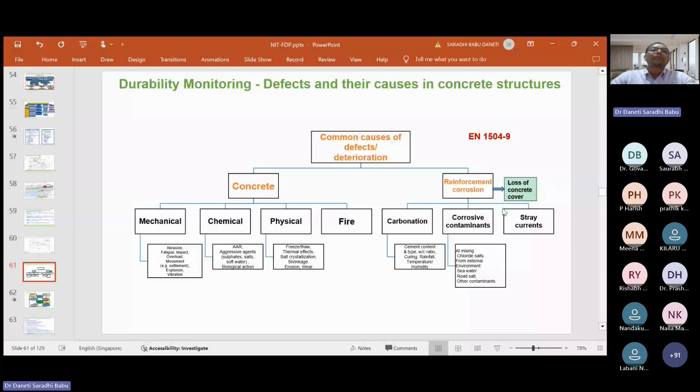Concrete related defects occur because of mechanical, chemical, physical or fire related damages, whereas reinforcement related defects occur because of corrosion of steel in concrete, which can affect the performance of the structure over time. So to have a durable concrete structure, you have to consider the affecting parameters and react and respond appropriately.

You need to do the necessary protections and repairs - sometimes surface protection, sometimes reinforcement protection, sometimes structural and non-structural repair. I won't go into all these details, but as mentioned, both defects are classified into two categories: concrete related deterioration and reinforcement related deterioration.

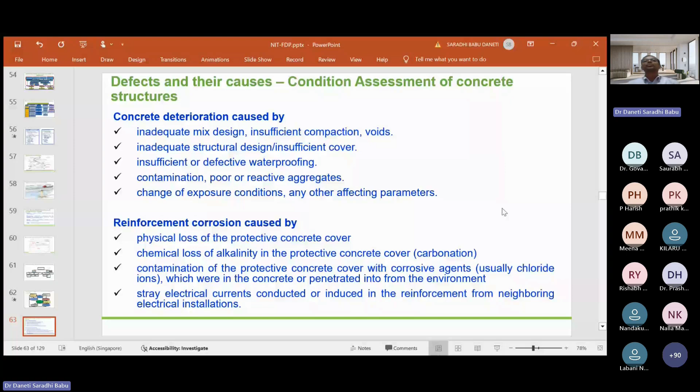When it comes to products for durability enhancement, there are surface protection products and injection products. For injection products, you need to choose the right type - sometimes the flexible type, sometimes the ductile type, sometimes the swelling type.

If it's a wet crack repair, you need to use polyurethane, a swelling type product, injected into the cracks to seal wet cracks - meaning cracks that are seeping water. Finding the source of water entry is the primary thing you need to eliminate before repair and rehabilitation in terms of protections, structural and non-structural repairs.

Sometimes we may have to use anchoring products. To protect steel reinforcement, if you're involved in health monitoring or rehabilitation of concrete structures, after removing the concrete cover you need to treat the existing steel. If it's not badly affected, minimal rectification and repair may suffice. But if badly affected, you need thorough removal of the concrete cover, or depend on cathodic protection methods instead of removing the concrete.

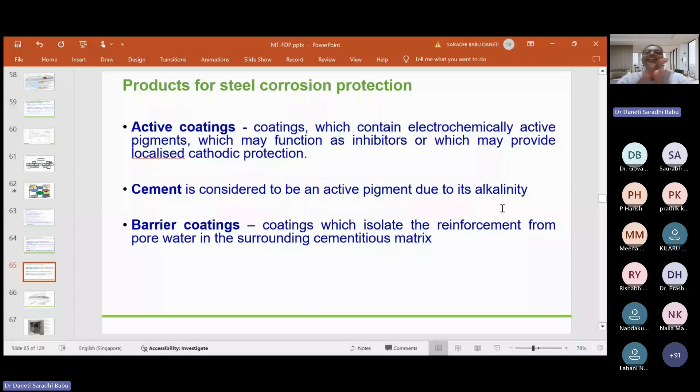You have to identify what kind of damage and what cause is creating the problem in terms of compromising durability. Identifying the potential causes is more important for your maintenance strategy and planning program, especially for the rehabilitation program.

In the surface preparation, you have to do proper preparation: a thorough substrate preparation, remove the contaminated concrete, clean up the steel reinforcement, and apply reinforcement protection coatings. You need a proper edge condition, and create proper key and interlocking between the new concrete and the old concrete.

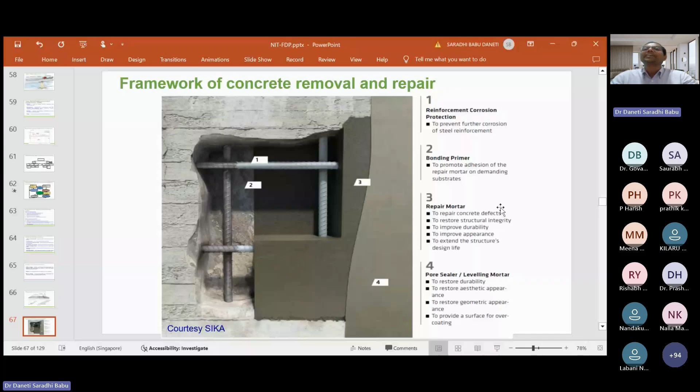So how to achieve long-term durability? You have to have a 3Q principle: quality materials, quality construction, quality maintenance. Then only you are able to achieve long-term durability.

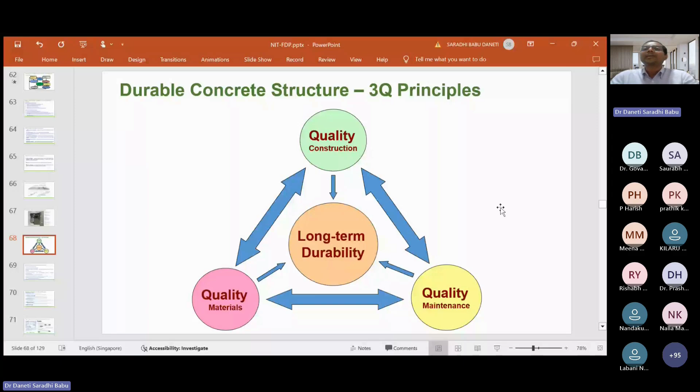Okay, so let's come back to the statement of problem for a research proposal or project proposal. All these points which I mentioned earlier apply. So how do you come up with a project proposal? You have to see what kind of project is actually announced by the government, and whether your research capabilities are suitable to that project proposal.

If it is actually your core area, you can see what your strong points are, whether you are strong at materials, whether you have characterization methods, or whether you are good at analytical and finite element modeling, because those analytical and numerical methods require some inputs. You may need to run some experiments to feed into the analytical or numerical analysis to come up with prediction models.

So if any PhD student is working, they may sometimes have to do both experimental and analytical, or both finite element modeling, in order to have those long term predictions.

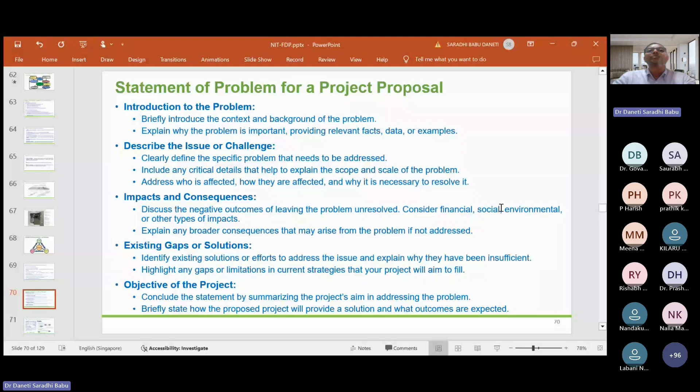Research is basically the creation of new knowledge. Sometimes it generates new concepts, methodologies, and understanding to get a better grasp of the problem and come up with a solution. R&D is actually to provide a final solution.

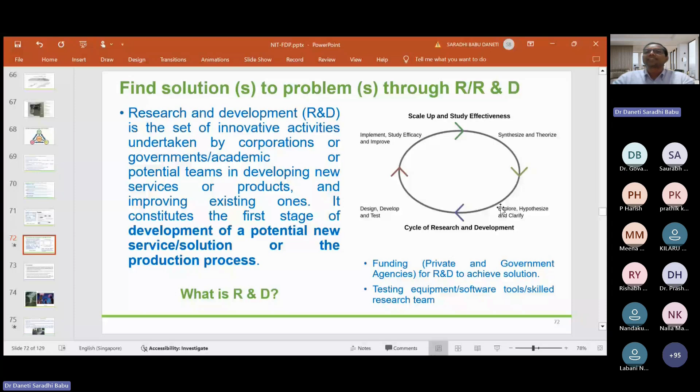These are innovative activities undertaken by corporations, governments, or academics. The aim is developing new services or products, or improving existing ones. The development of a potential new service, solution, or production process is what R&D is. I won't go into the conclusions now, it's almost 8:56.

The whole world is now looking towards sustainability and addressing CO2 emission related issues, with global targets of net zero emissions by 2050. By using supplementary cementitious materials, we can enhance the durability of concrete structures, and at the same time reduce carbon emissions.

We have to have a transition, shifting from OPC cements to SCM-based cements, as one way to move forward to tackle both embedded carbon emissions and the durability of concrete structures. Thank you all, that is all my presentation.

I'm actually involved in some conferences as a committee member. So if you guys are interested to participate in any conferences in Singapore, I will share the contacts with you - the flyers and things like that. You are welcome to visit. Definitely, I think particularly for PhD students, they need to fulfill certain publication requirements, so they can visit and present their findings. Sure, sir, thank you very much, sir.